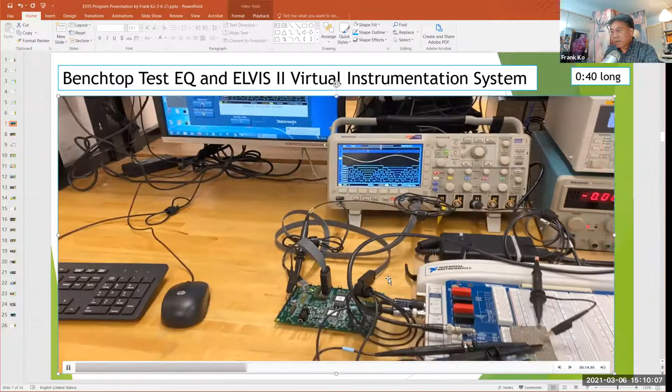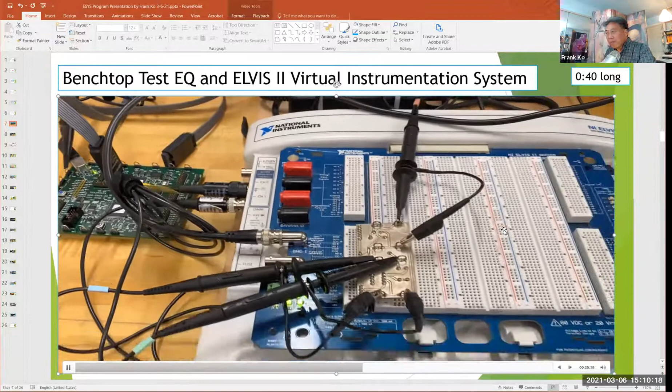The oscilloscope is reading information coming off of various parts of the circuit board under test, and the traces are ported into the ELVIS from National Instruments. We're very blessed to have these machines in addition to our benchtop machines for our students to use in the laboratories.

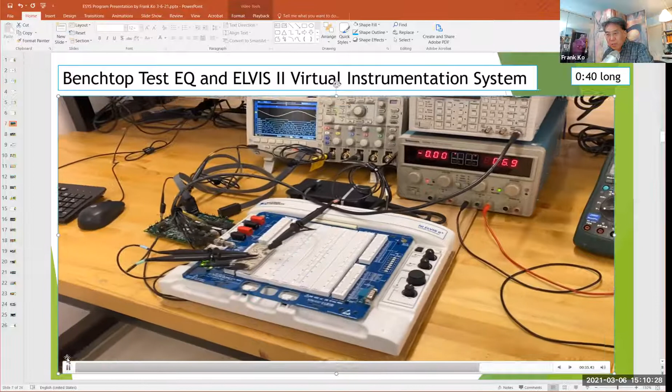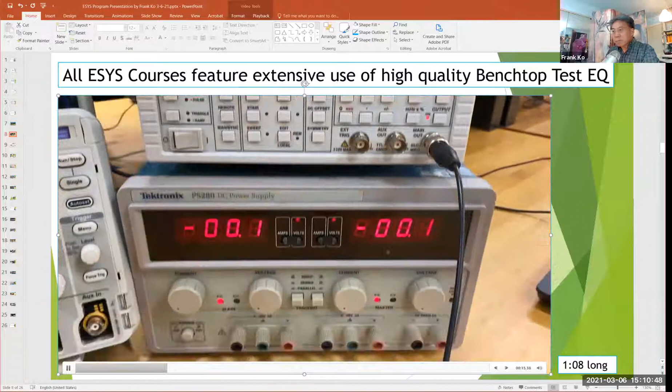In addition to the ELVIS, we also have outstanding benchtop machinery, starting with the function generator. It is a Fluke 271 function generator. We have our Tektronix desktop power supply and a 4-channel input Tektronix oscilloscope.

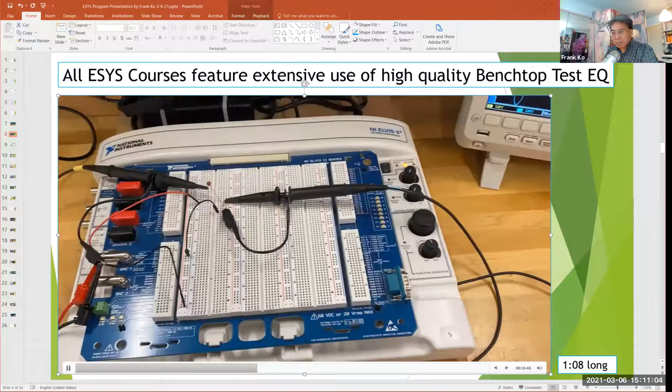So the same circuit that you saw earlier with the NI ELVIS, we're utilizing that board, and the probes are now simply connected to the function generator and the benchtop oscilloscope. So our students learn hands-on with real instruments as well as with the electronic simulator.

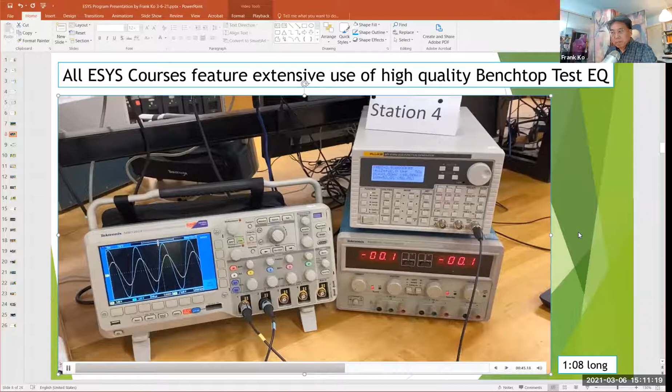The outstanding further connection here is that the screen you see on this oscilloscope is also set up such that students can capture that information in software and transfer it onto a report document of their choosing.

We'll also focus a little bit on this one particular opportunity, a robotics technician. I pulled this off of the Bureau of Labor Statistics, and as of 2016, all the numbers look very favorable.

If we look at a testimonial given by a robotics worker in the industry, outlined in red: every day my job would be teaching a robot. What do they use to teach the robot with? Something called a teach pendant.

A teach pendant is shown on the left-hand side of the screen. This is the device that we would use for programming a robot. As the technician notes, after you've learned one language, you can pick up others, because all robots are set up about the same. And that's very true.

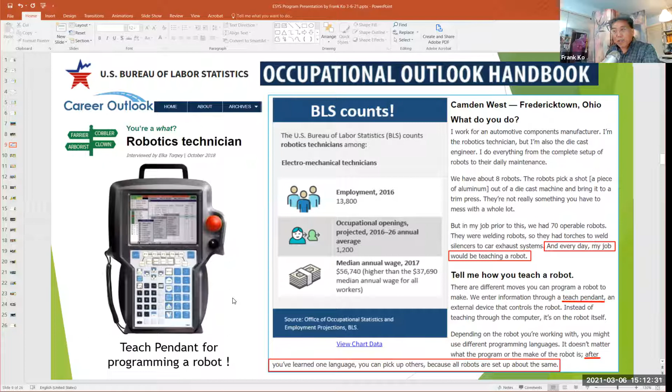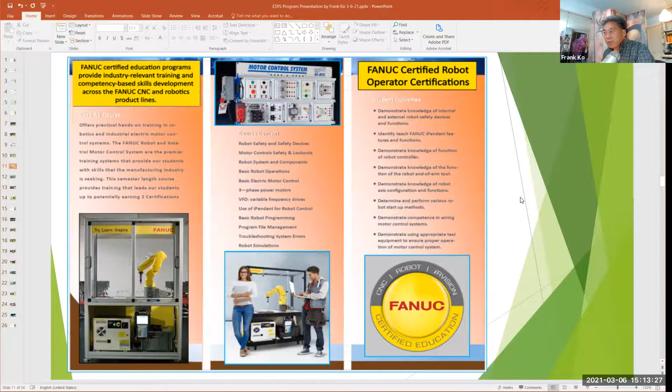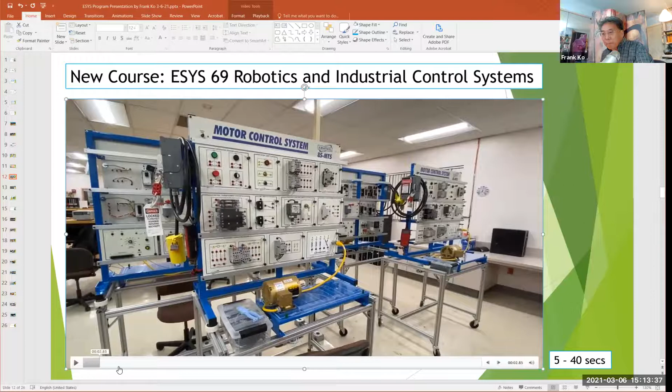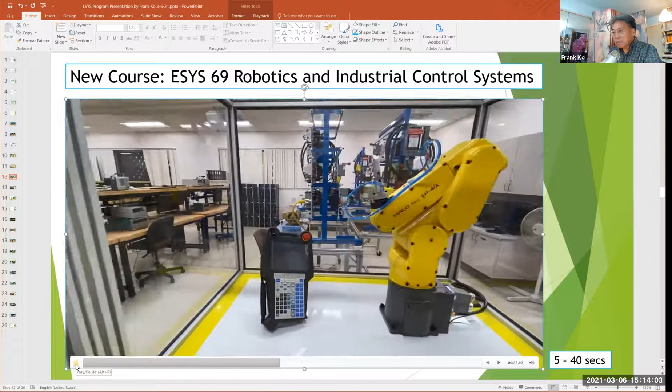Now, most exciting is this: this is our actual lab, and it shows our motor control system as well as our newly acquired FANUC robot arm. So that's the FANUC robot arm, and this is the teach pendant used for programming, the same teach pendant used in industry for programming various FANUC robot arms.

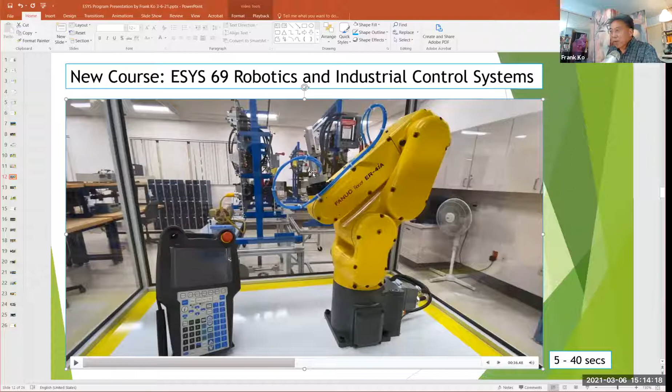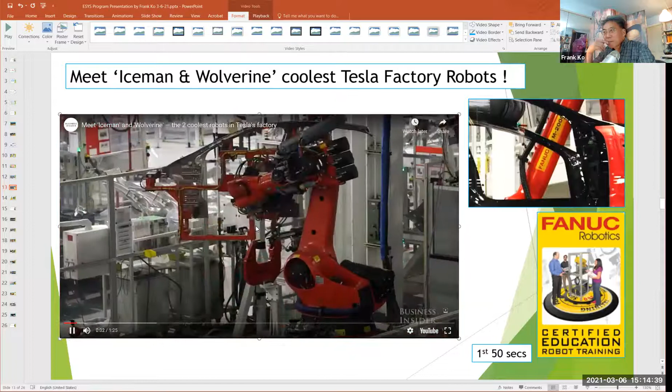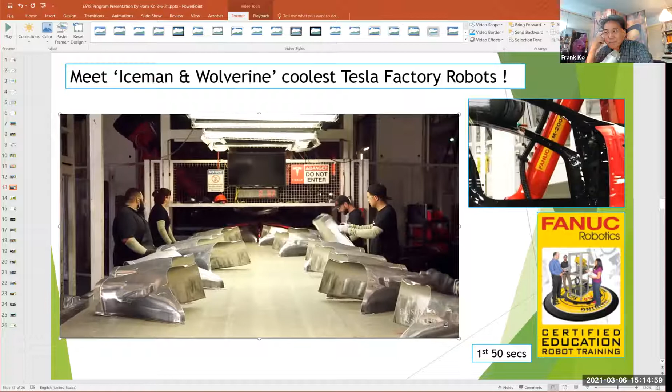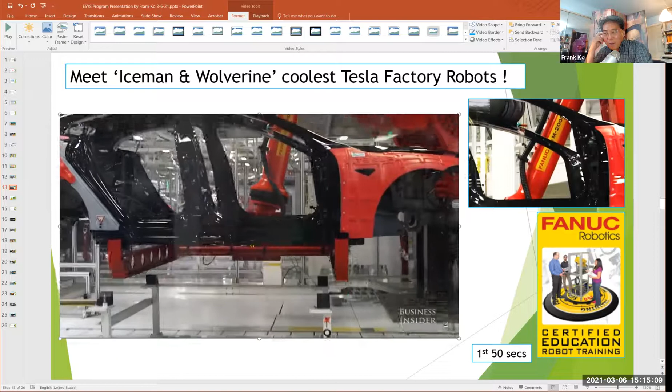And why robot arms? Well, this will give you an indication why and how popular robot arms are in manufacturing. Their most impressive robots, the Wolverine, the Claw, and Iceman. Love their names.

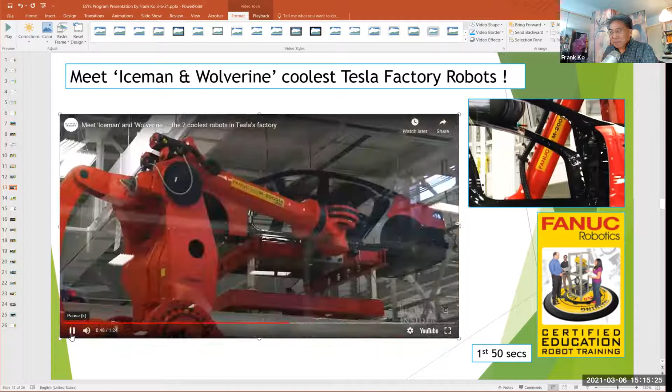And if you look at this still, that's a FANUC robot right there. So what we have in the classroom is just a smaller version of that guy.

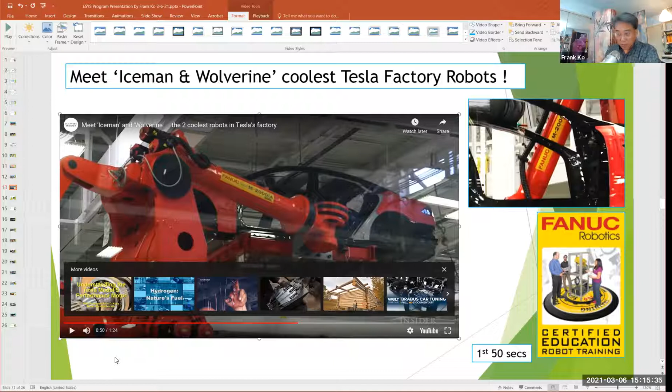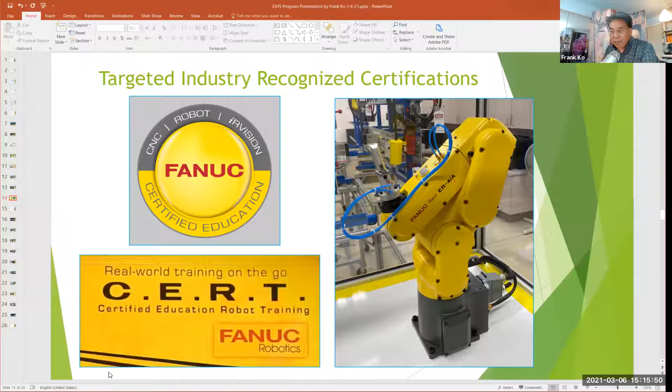In addition to that, we also offer an opportunity for students to earn certification in the operation and programming of the FANUC robot, which is really exciting, as well as CompTIA A+ certification for their proficiency in understanding computer hardware and software. So industry-recognized certifications are a real big plus for our students going into the job market.

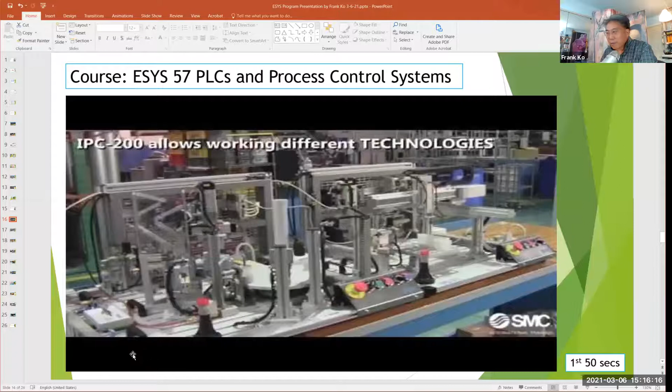Here is another system that we use for training. This is from our friends at SMC, called the IPC 200 Industrial Process Control Training System. It is made up of 3 modules: the 201 station, the 202 station, and the 203 station.

The 201 station simulates bottling, mixing, and fluid production. The fluid is then transferred over to the 202 station, which simulates bottling and containerizing, and then the containers are transferred over to the 203 station, where palletizing is learned. We have 2 complete sets of these 3-station IPC 200s, a very exciting training system that we're very blessed to have for our students.

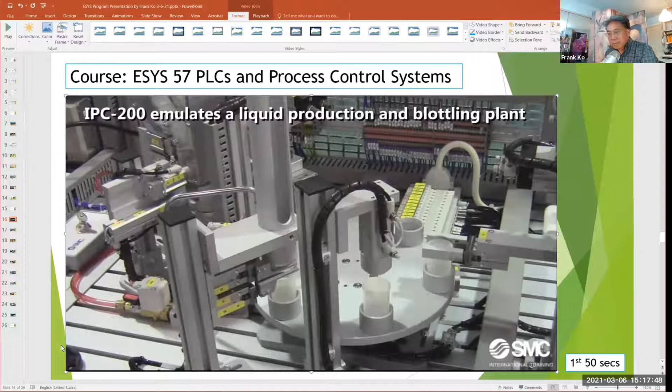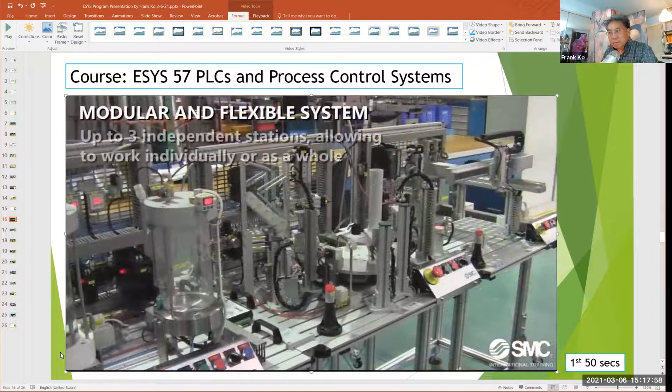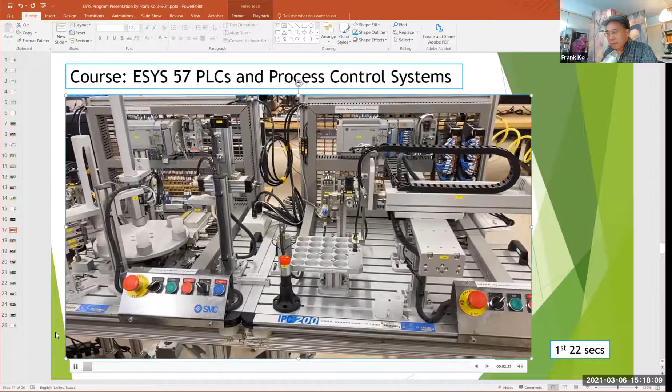Our own IPC 200 is demonstrated in our labs here. You're seeing the combination of the 202 and 203 stations, the containerizing of the fluids, and then the palletizing of the containers onto the pallet.

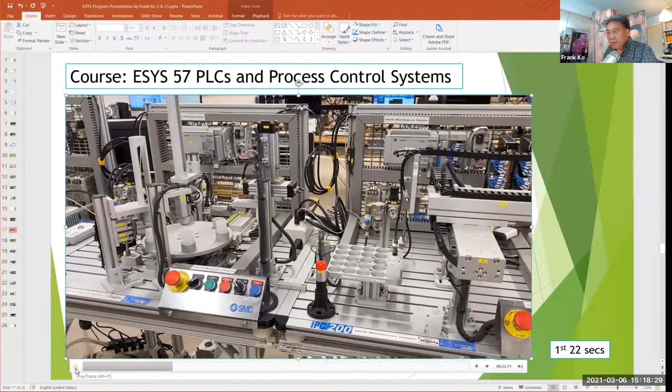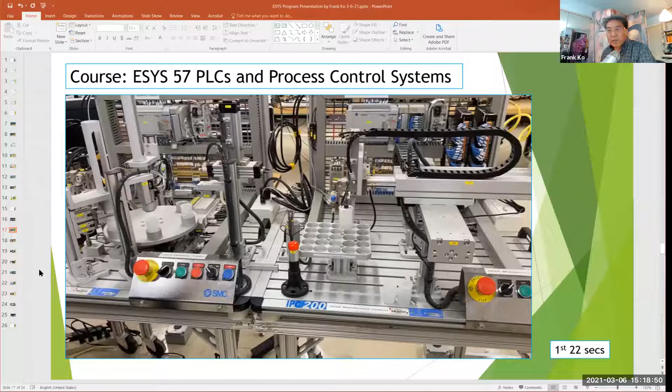As the students learn the programming and connections of the PLCs, these devices here, programmable logic controllers, are industrial computers that the students need to learn how to control and program. The upshot of this hands-on training with these machines is projects that are very exciting for us to share with you.

So we had a second auxiliary contact, that way it didn't just jump right across the second contactor. That might have been able to resolve that issue as well. A little limit switch right here? Yep, actually originally it only had one limit switch, but Todd was able to procure a second set. Where's the other one at? No, it's right next to each other, see, they're double. Each one is double.

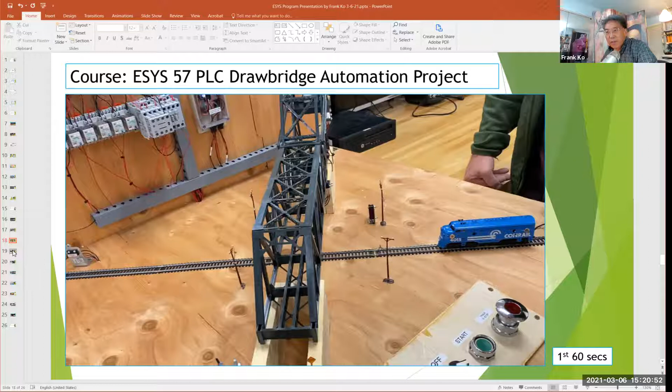Another project is demonstrated here with this team. Go press play, okay, so this is - go to the 2-minute mark.

No, it's a well-conceived, well-designed, well-built project, that you have a support shelf for your electronics and then your relays. So yes, everything is safe.

And we did try to get rid of the relay for the smaller ones, however they couldn't communicate with the system. We should try that in there. It didn't work, so we just go back to this. We know this works.

And what Walter has to share with us in a moment really encapsulates what the learning experience with team projects is intended to convey to students. Fantastic, Walter, you have something to add, I'm sure.

Yes, for sure. So the entire thing was a learning lesson for us because we incorporated all the material that we learned from the class, and then we used some extra research so that we can understand it much better. By doing this, it's kind of like opening up ourselves, getting more advanced, learning more about the PLC. I'm pretty sure some of my colleagues on the project are going to advance this to the next level so that we can understand more in detail how the PLC works.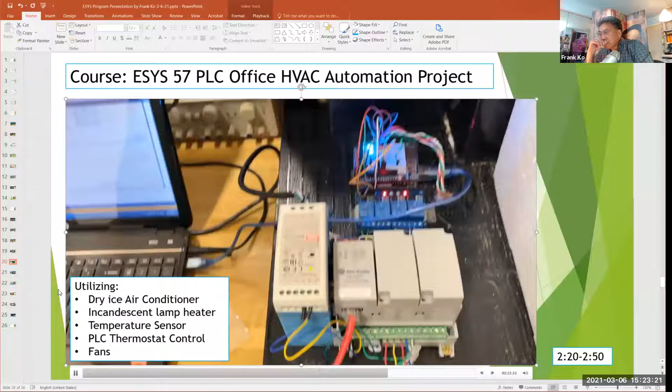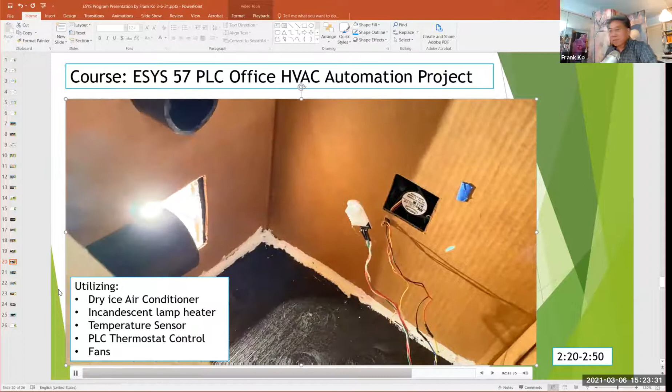So the cold air comes in this tube, and then this will return - that's your return. All right, so what were you using that fan for in the back? That's the outside air exhaust. So actually we have like a two-stage section.

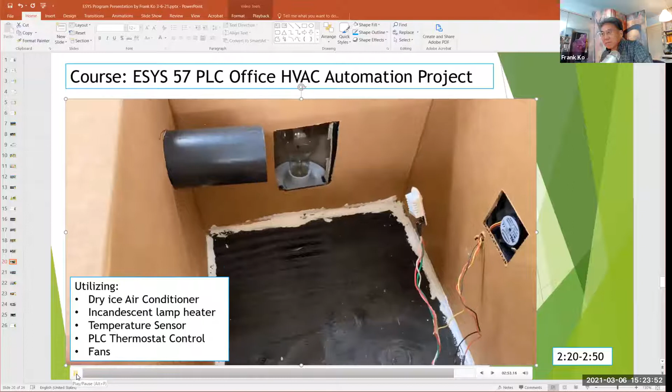So the exciting thing here is they built a conference room office with an HVAC system with a thermal sensor in the room - there's your thermal sensor, fans, as well as air conditioning via a dry ice container. So when the temperature in the room heats up based on the lamp creating heat in this room space, once a certain temperature has been achieved, it's deemed to be too warm, then the lamp will go off and the air conditioner blower will blow cool air from the dry ice container and cool this. And once the temperature comes down to another preset point of interest as determined by the sensor, then the air conditioner blower will shut off and the incandescent lamp will turn back on to heat the room back up to an appropriate comfortable temperature.

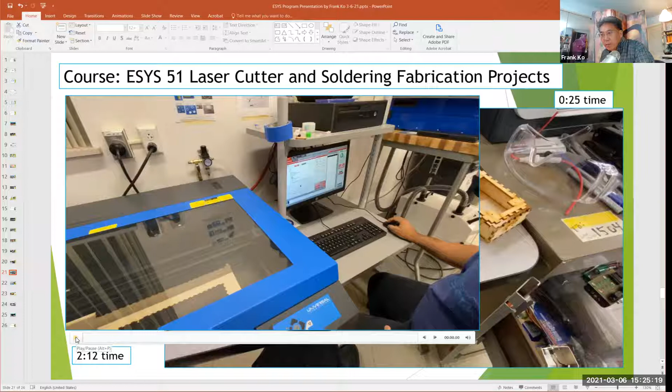Next, we also have in our ESYS program a wonderful fabrication course, and part of the fabrication course engages students in learning how to solder down to the surface mount technology, SMT level, how to do laser cutting, 3D printing. And so here's an example of the laser cutter. Go to this time mark, it's great.

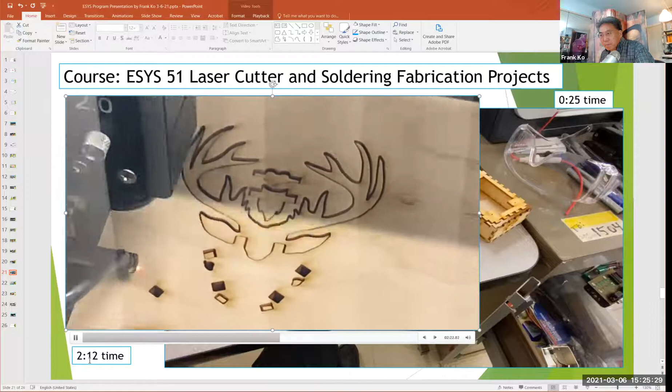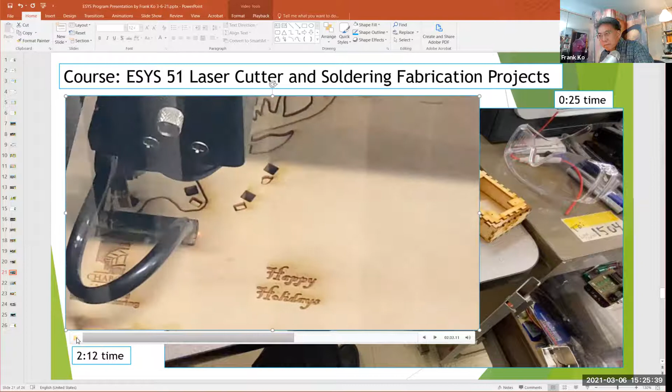So they program the laser cutter to do different things for them. Part of the laser cut projects will include containers for their solder projects, of which this is one.

This is the surface mount technology project that they hand soldered. We don't have a solder bath, so the students hand soldered each of the components. These are SMT resistors, surface mount technology resistors, SMT LEDs, surface mount technology LEDs, very carefully done by hand. If we have enough funds in the future for a solder bath, we'd like to include that.

As part of our growing program needs, this is all very exciting as part of our fabrication side of the program. Here's another side that's very exciting, and that is design for 3D as well as printing in 3D. Our designs are conceived by the students using various pieces of software.

Tinkercad is one of them, Onshape is another, or SolidWorks is another, and they design this way. Here's an example of one done in Tinkercad.

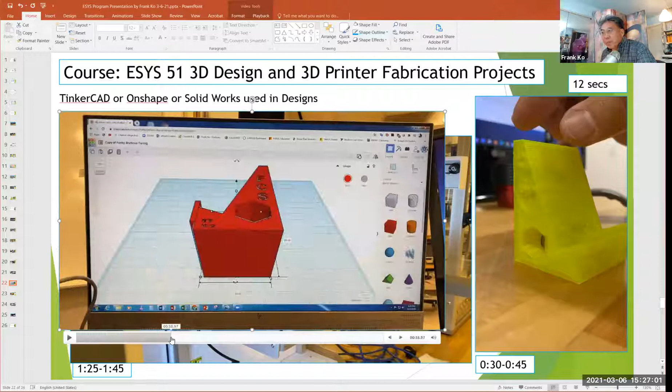So let me scoot this up to the appropriate time mark. That's good enough there. I've also got in here a hole through. These are holes that are carved in showing FCNS by KO, and I've got a little hex opening in here for a little more creativeness and also to lighten the visual appearance of this block of 3D printed material. So that hex does go all the way through.

And then let's see from the underside. Yeah, my lettering does not go all the way through. My lettering is just simply indented, if you will. And so the elements are, I start off with a rectangular block, and I start by creating.

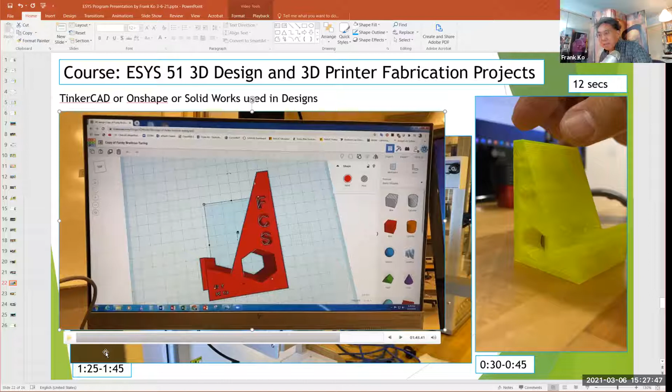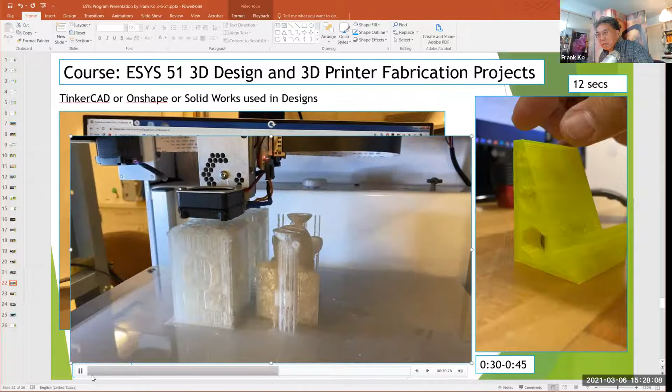And then once the design is achieved, then we actually bring it to the printer. Here's our printer creating the work. Now let's go to this time mark. And this is one of several laser 3D printers that we have, and one of several kinds of 3D printers that we have.

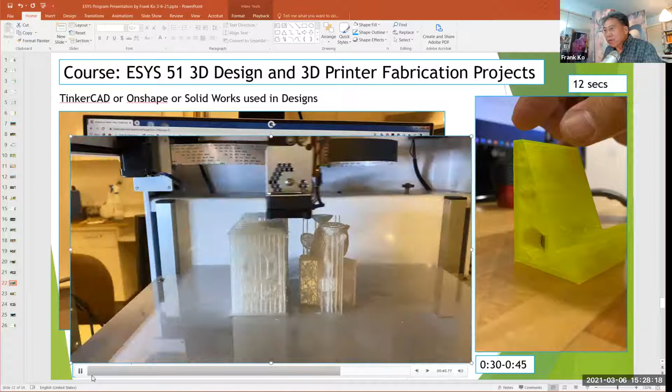And after the object is printed, then the finished object could look something like this. That's a cell phone stand that we've illuminated.

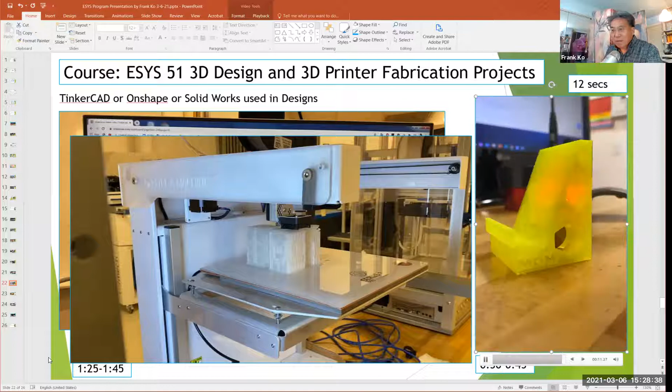And other fabrication projects include a DC motor build project. This motor build is really fascinating in that it starts off with a D-cell battery, 2 safety pins, a rubber band, a couple of magnets, and a hoop of transformer wire.

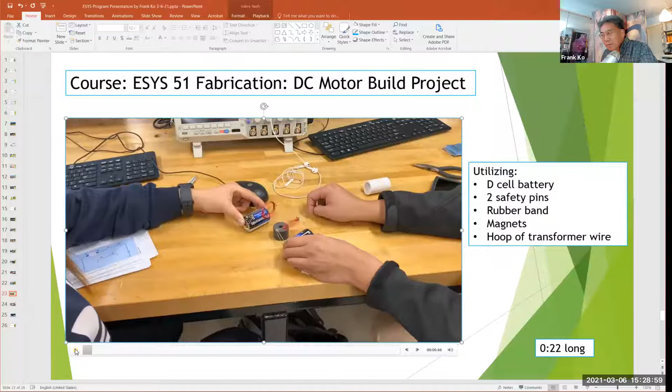Watch what they have done with this. Good angle, look at that. We have 2 motors working off of 1 stack of magnets. Look at this, last year we were able to get 3. Now, without moving your hands, turn around and wave at us. Hey, good job, my friends. That's great.

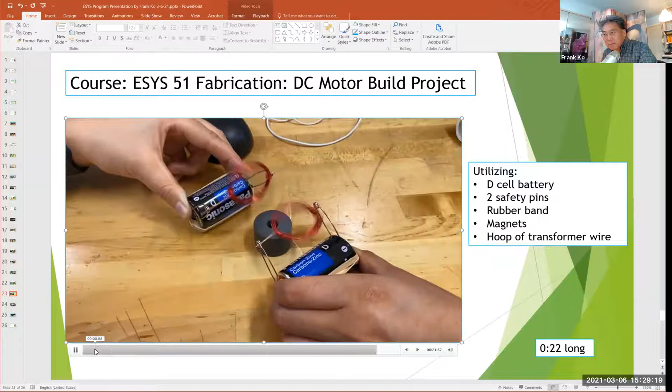We also host field trips from local high schools to get students excited about electronics technology. Here are 2 separate groups that came by this past semester.

Yay, got some LEDs, yay. All right, all right. You got something to be able to take home, show mom and dad. Yes? All right, fantastic.

In the hosting for the 15 minutes that we have per each group, the students were introduced to the concept of voltage, resistance, and current, built a simple circuit, and then they also built an LED circuit that would change into multiple colors that they would be able to take home and show mom and dad.

Here's another group. Wave, look at those bright LEDs. Nice work, everybody, this is great. All right, fantastic. And one more with our high schoolers.

Look at that, it's going, yes, yes. One more over here, oh look at this. Whoa, Jacqueline's got a motor working. It's like it's alive, look at that. Is that cool or what? She made a motor.

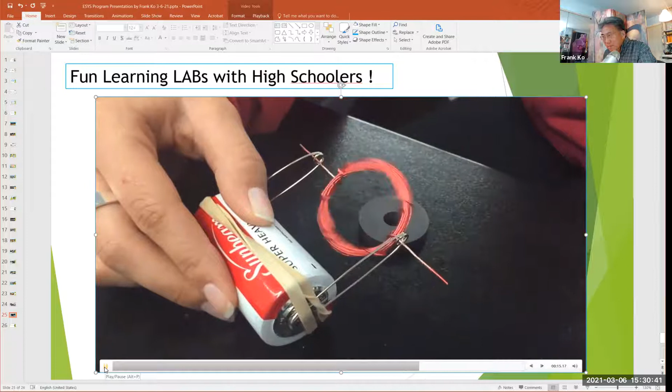Yay, so here we go. Are you ready to pursue your career in electronics technology? We try to create an environment that makes it fun for you, that makes it mentally stimulating for you, and also will challenge you, as well as give you career advancing real world skills to meet the demands of the job market. So if you're interested, please contact me.